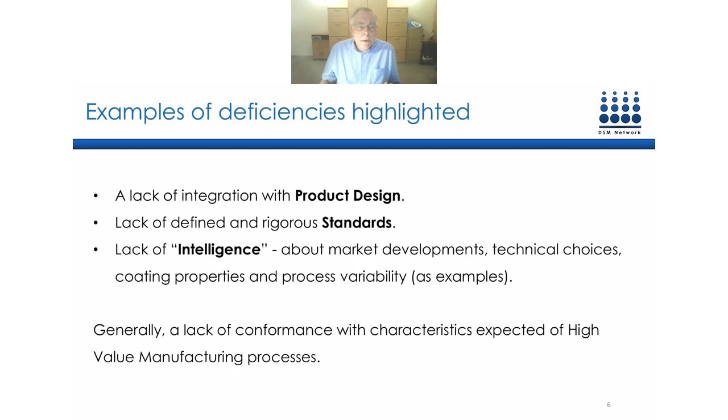As a result of this, Robert Quarshie of the KTN set up a thing called a special interest group.

A special interest group is a mechanism used by the KTN, Knowledge Transfer Network, to examine certain sectors of industry that they feel need special attention or to be looked at more carefully. In 2014, that special interest group produced a report titled an examination of surface engineering and advanced coatings, so that's called SEAC, Surface Engineering and Advanced Coatings.

Here you see the report that was produced, and the report is accessible online. You'd have to join this Connect organization, and then you can download this report. The report was called Time for Strategic Change, UK Surface Engineering and Advanced Coating Industry.

The report, as I said, was produced by a SIG, a special interest group. Why have a SIG? This was for several reasons. One was because of the perceived deficiencies, but also because surface engineering and advanced coating technologies had been identified as one of 22 national competencies in what was then the Technology Strategy Board's high-value manufacturing strategy.

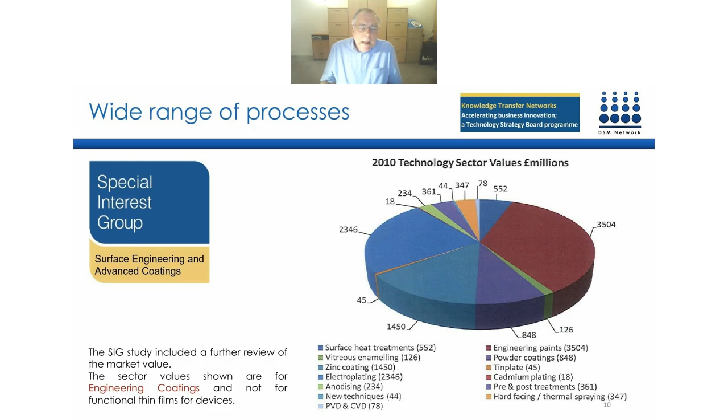More importantly, probably, these coatings are used in all of our key manufacturing sectors. So, for example, aerospace uses about £1 billion worth of coatings and treatments. Automotive uses about £2 billion annually. Construction about 3 billion, oil and gas about 2.7 billion. You can see other key sectors all use significant amounts of coatings.

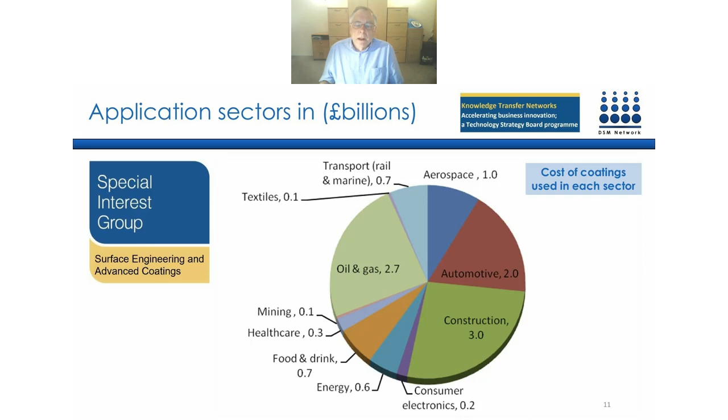So it is an important sector. It merits being looked at and being helped and being brought to a high level of innovation and competence.

As part of the SIG, Keith Harrison and I looked again at the market figures, and we added the government's latest categories and sector definitions, including food and drink, which weren't listed previously. What we found is that industries with a total turnover of over 383 billion relied on products which were coated. The actual products themselves that were coated had a value of about 140 billion, which is fairly remarkable considering we're driven there by about 11 billion pounds worth of coatings.

So those products couldn't function without coatings. So 11 billion pounds worth of coatings enable the functionality, or the key functionality, of 140 billion pounds of product, which then go on to contribute to industries with that 383 billion turnover. So it's a very, very important sector.

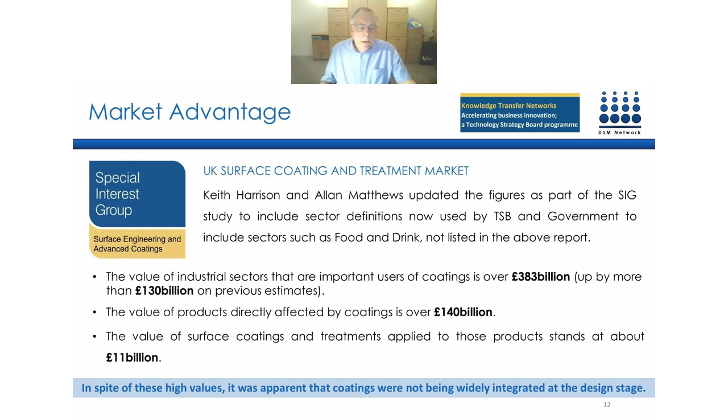Now, this diagram at first sight looks complicated. One of the key drivers within the SIG was David Rickerby. David was with Rolls-Royce at the time, and he produced for us this diagram which illustrates Rolls-Royce thinking at the time about coatings and the coating sector.

The feeling was that presently, at the time, the focus was on end user resources, supporting the current application supply chain. In other words, where products were failing, they would try to apply a coating, or where they were achieving functionality, they applied a coating.

What they wanted was for the coating sector to integrate with the manufacturing sector, to fully get involved in the design of products. In order to do that, the sector needs to go through the full technology readiness levels in terms of creating standards, validating standards, and introducing process control. Then you can feed the service experience back into the design stage and develop and validate, standardize, and actually bring through a more effective product with a fully integrated coating.

That's kind of my simple explanation of what that's illustrating. And that underpins and kind of emphasizes the need for digitalized information about the coatings and about the processes.

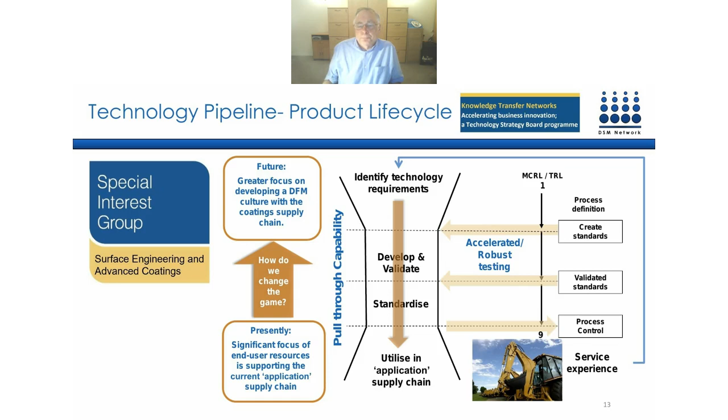So what the SIG recommended is certain actions were needed to address those barriers. So what was needed was better performance information about coatings and better accelerated tests about them, more applied and industrially relevant research, a need to address sustainability and environmental impacts of coating systems.

Of course, we're all aware of REACH, but there are other health and safety reasons why we need to be aware of sustainability and environmental impact of coatings. And then there was a feeling that we need to improve technology transfer. We need to encourage cross-sectoral exploitation.

It was well known that the coatings used in the digital sector, in the devices sector, were well digitalized, but the coatings in the engineering sector weren't. And by the way, those figures I gave you on the market values were just for the mechanical engineering sector. They didn't include thin film devices and semiconductors, which are all coating industries anyway, but the deficiency wasn't recognized to be in that sector. It was recognized to be in the mechanical engineering coating sector.

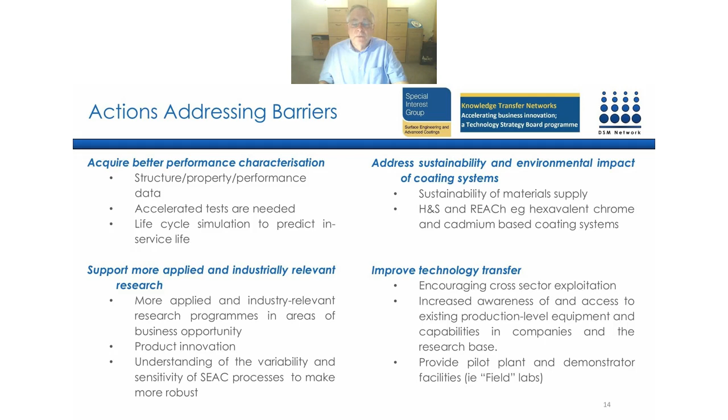At the same time, we've seen this rise in interest in Industry 4.0. So it was recognized that we had Industry 1.0 in the time of the Industrial Revolution. We went through to Industry 2.0 at the time of Henry Ford and mass production. Then we went into Industry 3.0, where you have PC control and automation. And now we are really in the Industry 4.0 regime.

We have so-called smart factories, which utilize cyber physical systems to monitor and control manufacturing processes. So the idea is that manufacturing is completely digitalized and carried out on demand, often to near net shape. We are, in a way, fortunate that the needs of the coating sector are paralleled with the needs of many other sectors in industry, and the driver towards Industry 4.0 means the coatings industry needs to also adopt and adapt to that requirement.

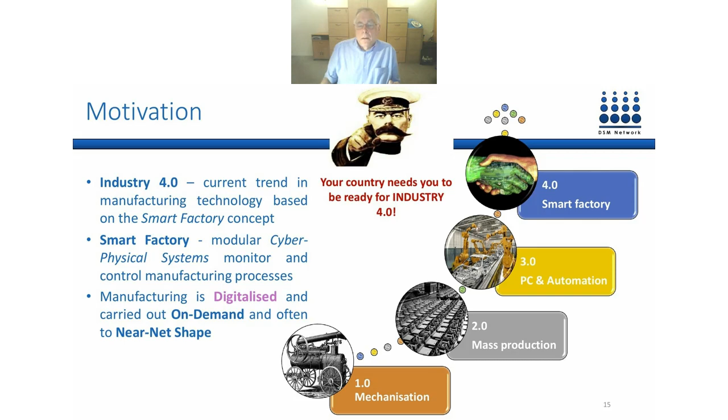This is reflected in government policy. In the government policy paper of December 2018, the policy was set out that we had to strengthen the UK and lead industries in the future via what they call 4 pillars, or grand challenges, as drivers of productivity.

Within these 4 pillars you can see AI and data as being key. The government policy states that those 4 pillars, which include mobility, aging, and clean growth, will drive an increase in productivity under the headings of people, ideas, business environment, infrastructure, and places.

That was underpinned by something called the Made Smarter review, which estimated the benefits of adopting industrial digital technologies to be up to 455 billion in the next decade for the UK manufacturing sector. Now, we've said that the coating sector is worth about 11 billion and related products about 140 billion.

But in terms of the academic lead, although it's recognized throughout the world that the UK has some of the best academic research in coatings and treatment processes, it was also recognized that no single UK university has all the required interdisciplinary expertise, and there's a lack of connected knowledge in the area of digitalisation in surface engineering.

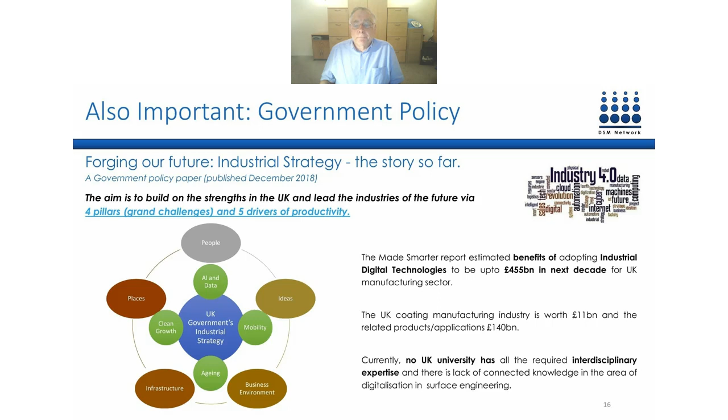Another point made in the Made Smarter review was that the UK is lagging behind other advanced nations in overall productivity, whether measured in output per worker or whatever measure you wish to apply. It was felt that this was due in part to lower levels of adoption of digital and automation technologies, and that this was particularly acute amongst small and medium enterprises.

Now, when people talk about improving productivity, they often talk about the 7 wastes. If you go online and search Google for 7 wastes, or even 8 wastes, another jargon term, you see diagrams like this. This one's taken from a particular source, but there are many out there, and I've extended on that one.

The wastes include overproduction, too much inventory, too much transportation, too much motion of people carrying things around, waiting for things, waiting for raw materials, waiting for product to come through, defects, and over-processing. Of these, overproduction, defects, and over-processing are key. If we can reduce these, we can increase the added value and increase the productivity of industry. This idea of getting these aspects under control is no more important than in the coating sector.

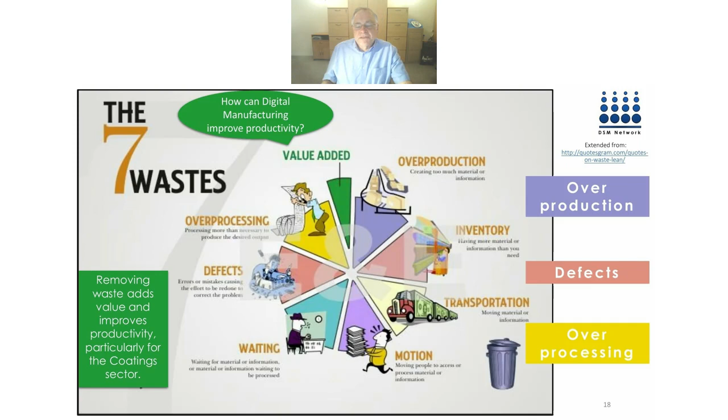So in order to digitalize, they call it the digital gap - how far industry is short of being fully digitalized. But if you can close that gap, you can get better utilization of your assets.

You can reduce your dependency on tacit knowledge. You can reduce the time and cost linked to product verification. You can improve and give visibility to all business performance metrics like yield, right first time, cost, delivery, quality, and equipment effectiveness. And you can fully enable and improve design for manufacture. You can open up new business opportunities and provide a framework for developing improved business as well.

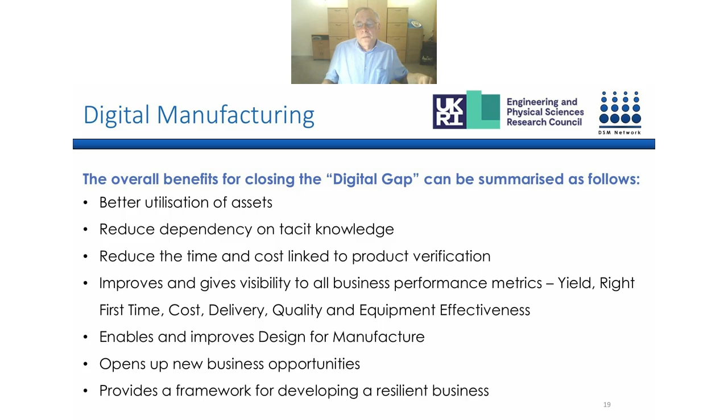So that explains why we need it in academia. We need to improve the research we do to achieve those benefits. But also, as I said, that report, the SIG report, was driven by industry.

Fantastically, the industry has grasped this challenge and created something called SELF, the Surface Engineering Leadership Forum, which is an industry network. SELF will work closely with the new EPSRC Digital Surface Manufacturing NetworkPlus, a £1 million investment by the EPSRC to bring together the diverse expertise and capabilities in UK academia to enhance digitalisation in surface manufacturing and move the sector forward to meet those Industry 4.0 challenges. It will be done in very close collaboration with SELF.

More about that later. So the Digital Surface Manufacturing Network already has, well, at the time we applied for it, 60 members.

It's now got more than 100 members from over 36 organisations. The main academic teams are at Manchester, Queen's University Belfast, Sheffield and Cranfield, and Saurav has just moved to London South Bank, so we've also got London South Bank University involved.

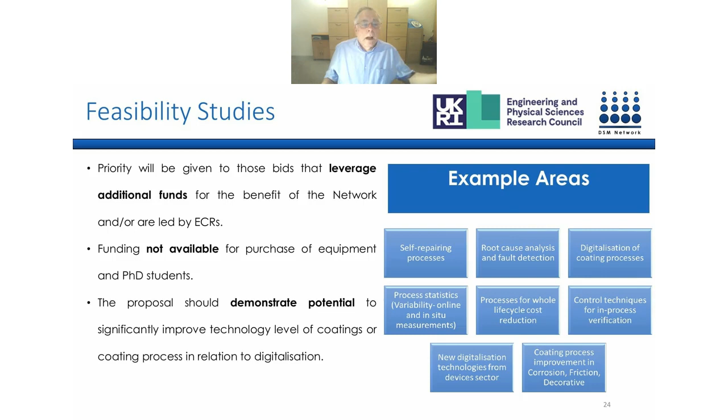And demonstrator projects, which I mentioned, will include things like the production of predictive digital twins, multifunctional coated surfaces, multi-objective optimization, automated masking, in situ non-destructive inspection, and in situ measurements.

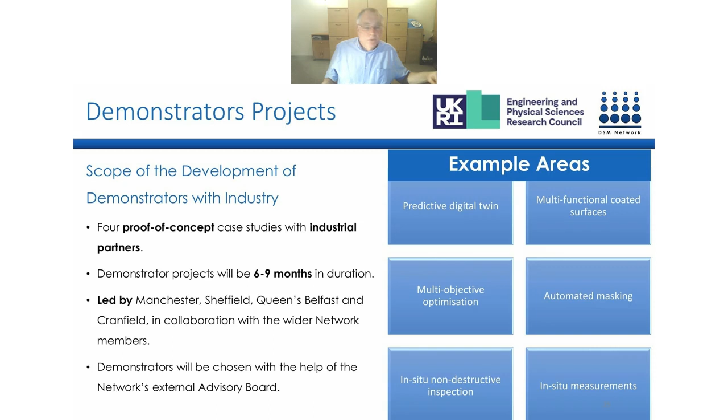Again, just as examples. Training and development will be a key part of the NetworkPlus. It will involve mentoring, fora for early career researchers in particular, secondments of people, academics into industry and industry into academia, and there'll be a summer school next year.

The Digital Surface Manufacturing Network will work with SELF on its new apprenticeship program, which was largely driven by David Rickerby. David was telling me yesterday that a key part of level 7 of the apprenticeship program will be to address the 7 wastes. So if you want your people to understand and address the 7 wastes, please get them started on the SELF apprenticeship program, which is fully validated and conforms to all of the apprenticeship requirements.

The network structure includes a management team: myself, Adrian Murphy from Belfast, Ashutosh Tiwari from Sheffield, and Saurav Goel from Cranfield and London South Bank. Our industrial representative is Bryan Allcock, and our network manager is Pamela Sharma.

There is also an independent advisory board incorporating David Elliott from the Surface Engineering Association and from SELF, and from academia, John Nichols. Our international representative is Jose Luis Endrino, formerly at Cranfield and now in Spain. For the EPSRC, we have Becky Chisborough, and for government agencies, Robert Quarshie, who has been a strong advocate for surface engineering in the higher corridors of government and most effective in getting improved funding for research into coatings and surface engineering.

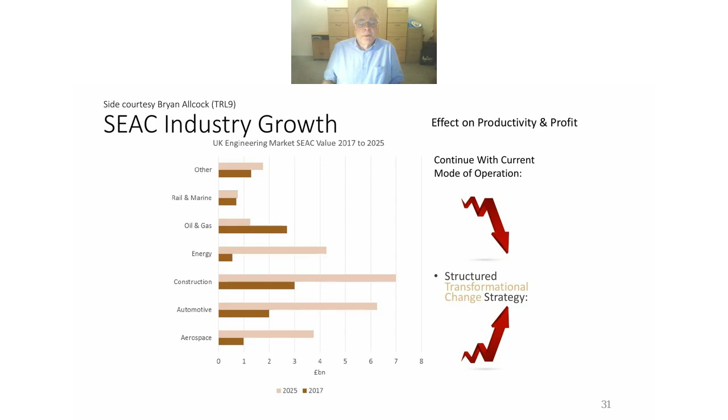But if we do go through a transformational change and adopt these digitalization practices, the sector will be able to address these growing markets, and the profitability and productivity will improve.

Bryan also presents this in this way, or the people that work with Bryan, including Dave Rickaby, talk about a transformational change—moving from being match fit to being best in class to being world class. You need to go through a series of stages in order to win and move forward.

You can look first at core activities like operational improvements, addressing the 7 waste methodologies, moving towards the digital, filling the digital gap, implementing digital manufacturing, until eventually you move to a full design for manufacture, fully transformed industry, applying design for manufacture.

That's the transformational route we intend to go through, both within the digital surface manufacturing or digitalized surface manufacturing network and within SELF.

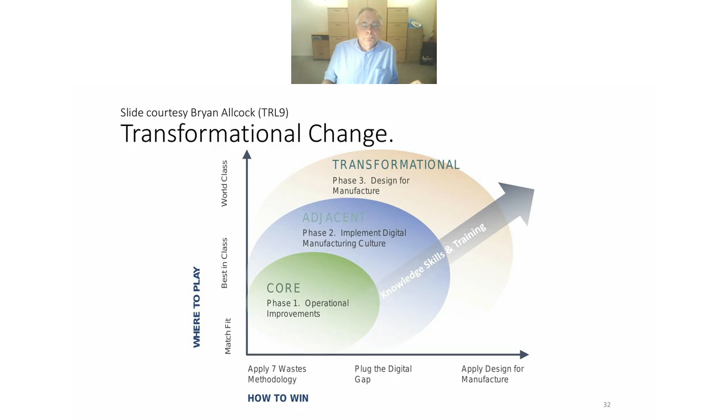Of course, there's nothing very new in this, but often you find that people reinvent things. I know statistical process control really took off in the 50s, but my thinking is that with full digitalization, we can fully access the benefits we're all aware of that you can achieve from statistical process control.

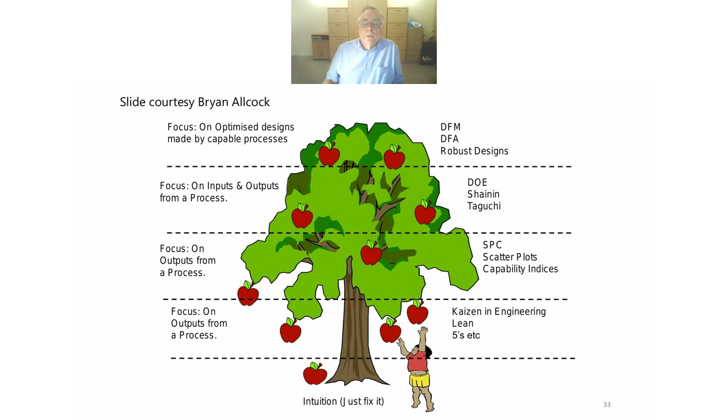Some aspects of control - this is a slide which Bryan sent me, and David was telling me this is very much also his input. You start off by looking at predictable performance, asset care, control of inputs and process failure modes and effects analysis. Look at the process basics, have reaction plans if things go out of control, and be ready to accept that when you introduce your reaction plan and don't get it back in control, you've got to rethink the whole process. You've got to look at variation reduction, process capability and key performance variable strategy, continue with process failure modes and effect analysis, and then go into your engineering attributes, engineering standards, control strategy and validation to ensure you meet cost and quality requirements.

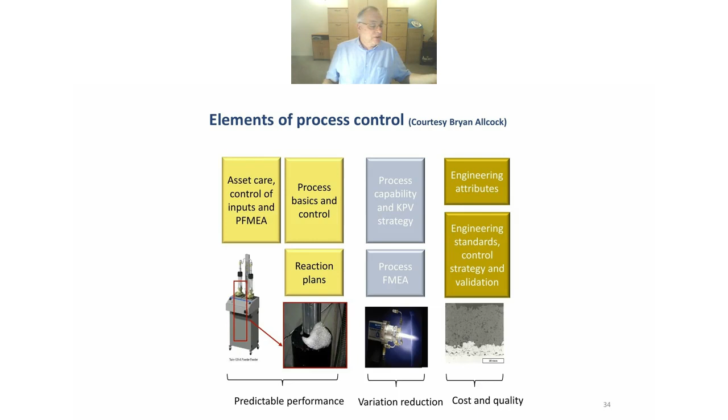This is the kind of thing that's been implemented over some years. This shows one particular manufacturer and how they've managed to bring variability well into control using asset care, in-process checks, compliance audits, and in-process verification. So this is the underlying understanding of what we need to do.

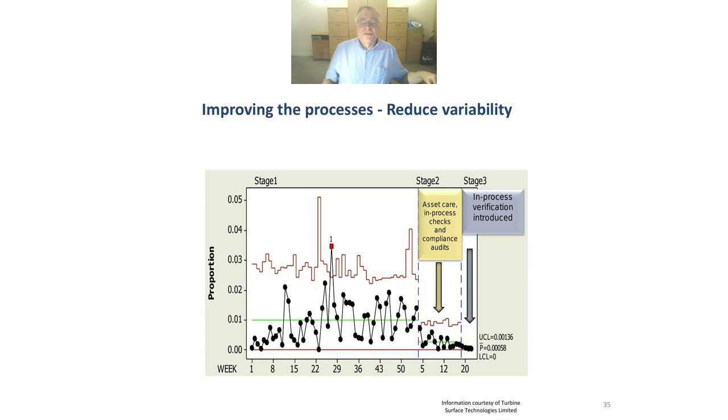Digitalization effectively links the digital world with the physical world. This is a slide I got from Saurav Goel, part of a keynote paper from Richard Leach at the CIRP, the main production engineering research organization. So basically, digitalization is a virtualization of reality, one way that was stated. We attempt to understand a machine's function by creating a digital blueprint of its reality, so everything you see is represented digitally.

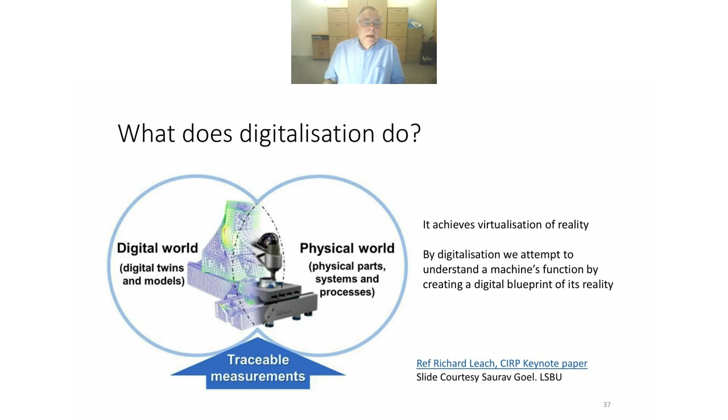Coming back to Bryan Allcock, what he's done - he says his best operators can see and hear when a process is operating well. But of course, you can't rely on the subjectivity of the operator. So what Bryan has done very effectively is introduce so-called cyber physical devices, sensors within his process, to observe and listen to the process, and to ensure that his processes are under control, fully digitalized via these cyber physical devices which monitor the process.

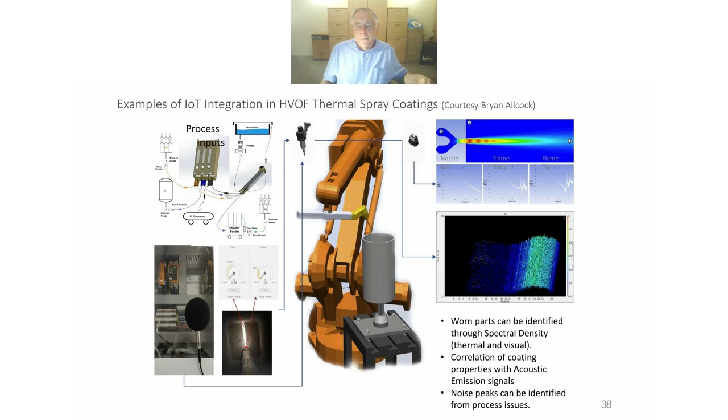At Manchester, we've done quite a lot of work on the plasma-assisted electrolysis process, and these slides are from Aleksey Rogov and Aleksey Yerokhin. Aleksey leads this group, and for plasma-assisted electrolysis we can remove material, for example by plasma polishing. We can modify material through cathodic and anodic plasma treatments, and we can convert surfaces through, for example, plasma electrolytic oxidation. So basically you combine electrode reactions with high energy species from the plasma.

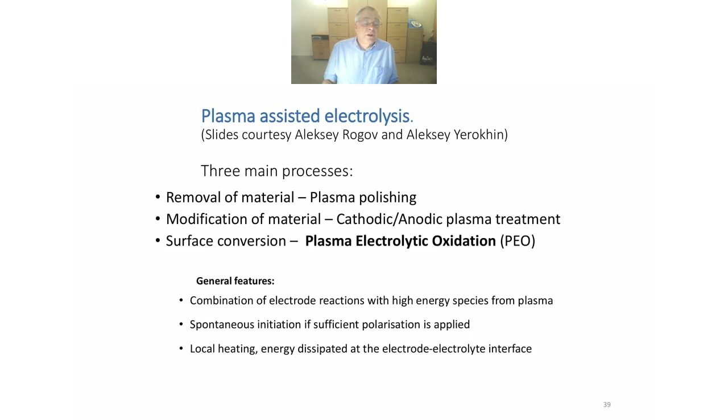You can spontaneously initiate the process if you apply sufficient voltage, and you can get local heating, and the energy dissipated at the electrolyte interface allows you to convert the surface of that electrode. Quite a powerful technique - it's fast, no pre-treatments, better protection, compatible with complex shapes. It's very safe, no toxic elements involved, and you can produce a wide range of surface properties.

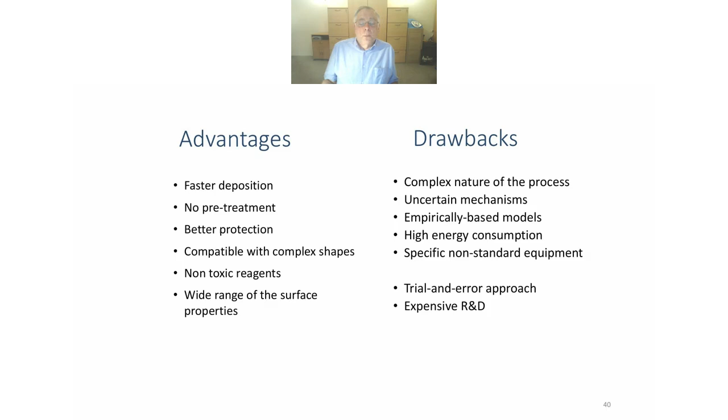The drawbacks, which is what lends itself to digitalization - it's a complex process, the mechanisms are somewhat uncertain, it's very empirically based, has high energy consumption, and you spend a lot of power heating the water-based electrolyte. It uses rather specific non-standard equipment and has adopted in the past a rather trial and error approach with rather expensive R&D practices.

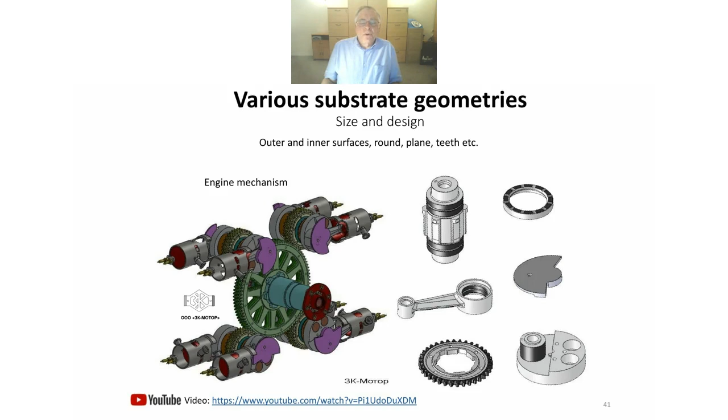So what you've got to do is go back to your basic equipment involved in your plasma electrolytic process and fully digitalize it and link it. So you've got your power supply, the electrolyzer itself, the cell, the specimens, the sensors, the digitizer, the data logger, and then other features like cooling and gas extraction.

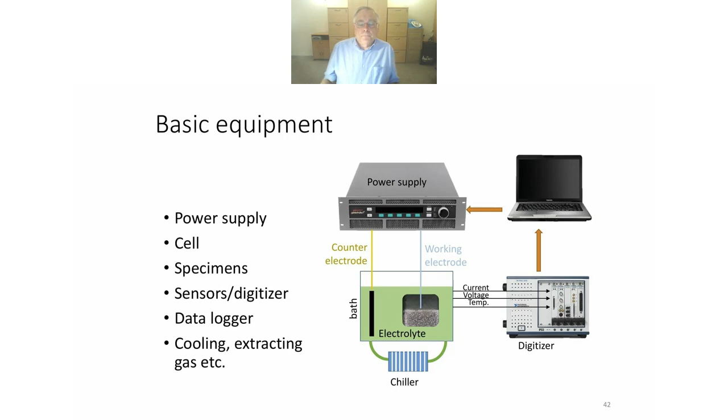What Alexei Rogov has done really draws on the capabilities of digitalization. He says you've got to develop a G model - your geometry and shape - and a process model, which he calls the P model. You've got to bring together the P and G models, might even incorporate 3D printing into production of your part, and then go through to production in a very controlled way. Very difficult to do this, of course.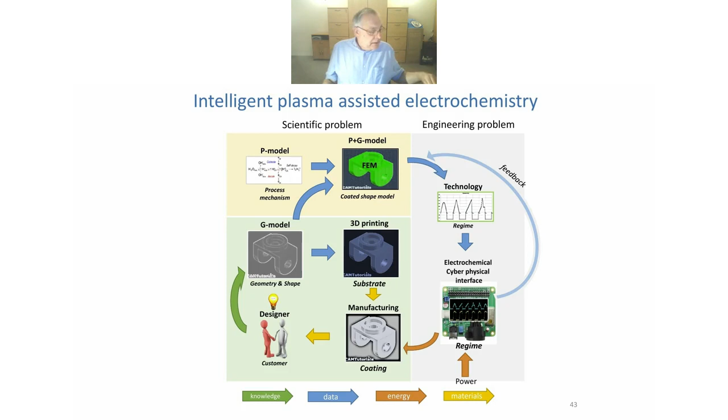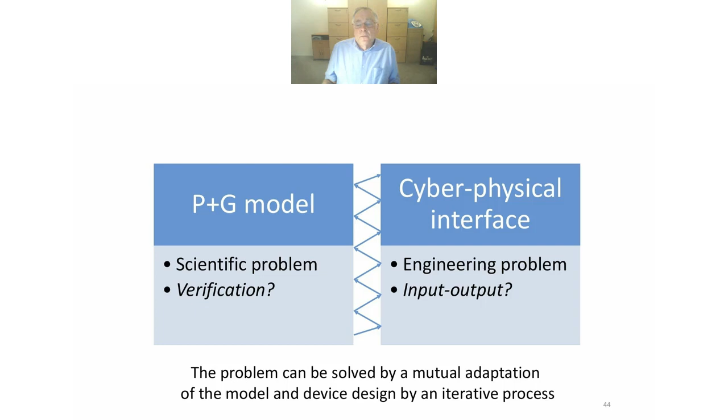This is the scientific problem, and there's an engineering problem, and that relates to how you link all this into your cyber-physical device. This is something that Alexei has managed to do, linking together the process and geometry model with the cyber-physical interface in a rather iterative way, which gives you the control you need. The key to this is to create what they call a digital twin, as I mentioned.

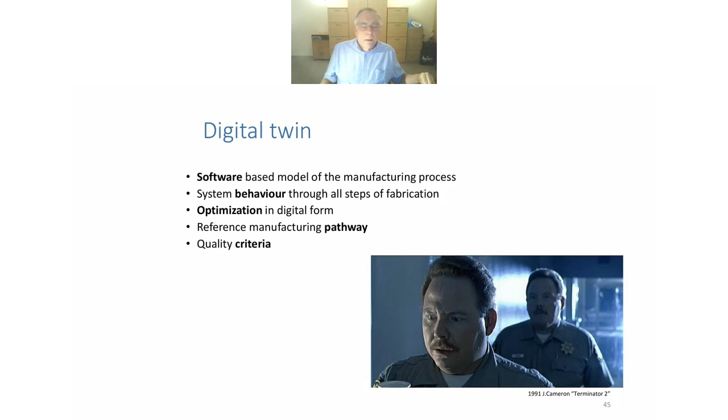So you need a software-based model of the manufacturing process. You've got to be able to follow the behavior of the system through all steps of the fabrication. You've got to optimize the digital form and have a reference manufacturing pathway with full quality criteria. Just to illustrate what that means.

In normal, traditional production, you produce something and then you test it. And if it doesn't conform to the quality criteria, you reject it. You don't monitor faults during the process, and you could easily produce junk. You could go some way to overcoming some of that by having intermediate progressive testing, but even then you could well produce defects which you can't correct during production.

However, if you have a full digital twin and you follow your production, you can do it virtually to begin with, or all the steps of the way. You can actually monitor defects or the effective creation of defects on a microsecond basis. That's the core of digitalization and the benefits of the digital twin.

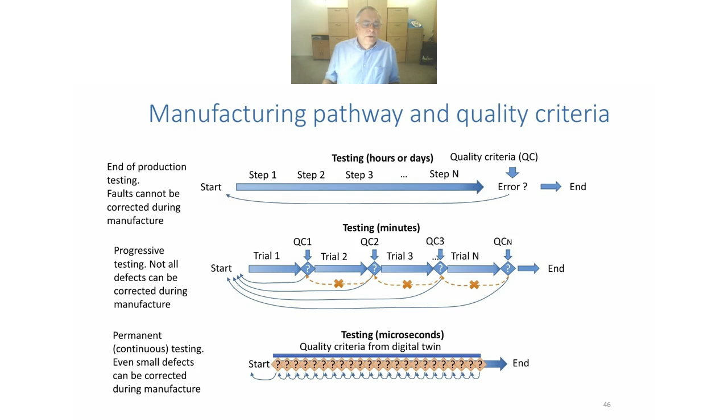Another diagram - the old adage is it's better to build good quality in than test bad quality out. What this one does is you could easily produce bad quality and you just have to scrap it. With this, you ensure that you always produce good quality and you're in total control of the process.

So another diagram here from Alexei Rogov. You will have your ideal manufacturing pathway, and then you will monitor it. This can be in the shape of a digitalized twin, if you like, of the real process. You can run through your digitalized twin process or the real process by monitoring with your cyber-physical device, and then utilizing your digital twin to monitor when you're going out of control.

Now, that might seem like an abstract concept, and it is rather abstract, and it's difficult for people often to get their head around this, but it works, and it works very effectively, and it really does illustrate very powerfully the benefits of full digitalization and the building of the digital twin.

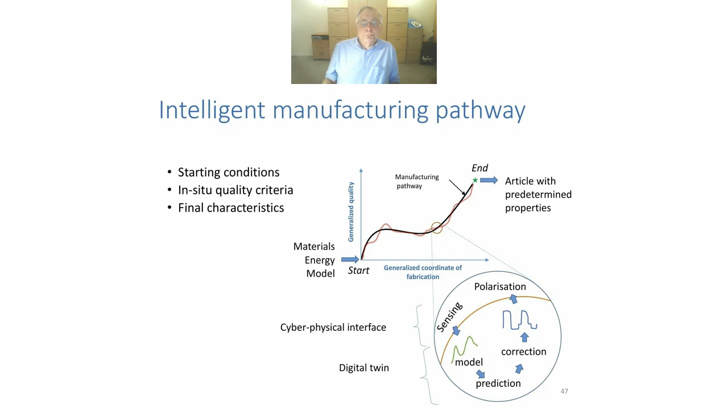So it illustrates how an intelligent manufacturing pathway can be devised and followed - basically a trajectory of the process parameters available for automated tracking and decision-making under in-situ manufacturing control. Fundamentally, it incorporates a digital twin, a complete model from which a certain solution can be derived. And of course, there can be many pathways. The beauty of this is you can easily revise the pathway depending on the requirements of the surface properties for different applications.

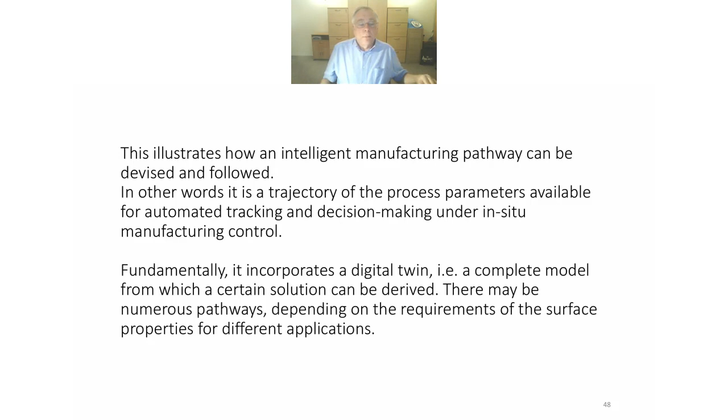Just to reiterate what the NetworkPlus will do: it will encourage academic research in this field, improve process and coatings modeling, facilitate state-of-the-art coating facilities, drive improved digitalization in the coating sector - the processes and the coatings - implement improved characterization analysis, improve performance evaluation and test methods, accelerate fruition of new innovations to market, enhance coating throughput rates, facilitate full life cycle analysis for coated products, and this list is extending all the time.

I think hopefully I've turned you on to the benefits of digitalization, and you can see that it is phenomenally powerful, and it's going to give us all kinds of benefits. However, we're only just starting this journey. The route to full digitalization is very challenging, as you can probably tell from what I've said. But now we have a clear understanding of the challenges and the determination to succeed. We've got a roadmap and a strategy, key participants on board, and we're aligned with governmental strategies, research council strategies, and very importantly, with industrial strategies. We really do hope that you will join us in this journey.

So thanks very much. That's the end of my talk.

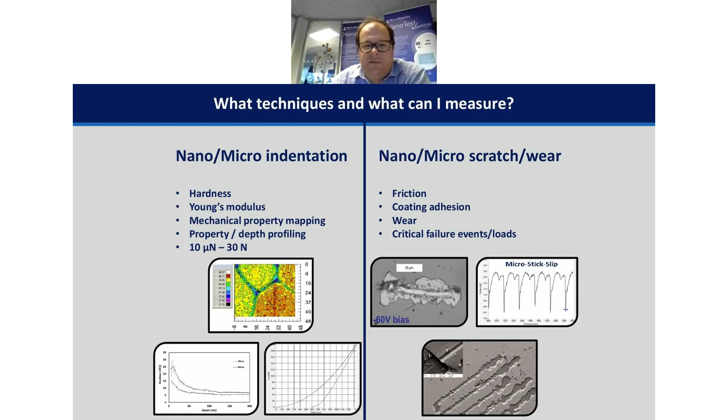We have some other tribology techniques as well, which bridge the gap between scratch testing, a single contact high pressure loading tribology test, and what we might regard as traditional tribology work with things like pin on disc tribometers. So we have some reciprocating sliding tests at different scales: nano fretting, and a device called nano tribo test, which allows us to do reciprocating sliding up to tens of millimeters sliding distance scale. Again, we can study friction and wear with these techniques, so we have different tribology techniques for different scales of interest.

Moving along the strain rate scale, the strain rates associated with indentation testing and scratch testing are pretty low, but of course a lot of materials are subjected to very high strain rates in their real world application, and it's very useful to be able to replicate those strain rates at the lab scale during the development process for coatings and bulk materials.

With these techniques, nano and micro impact, we can create single or repetitive very high strain rate contacts to look at toughness, fatigue resistance, and effective hardness at high rates of strain, which we call dynamic hardness.

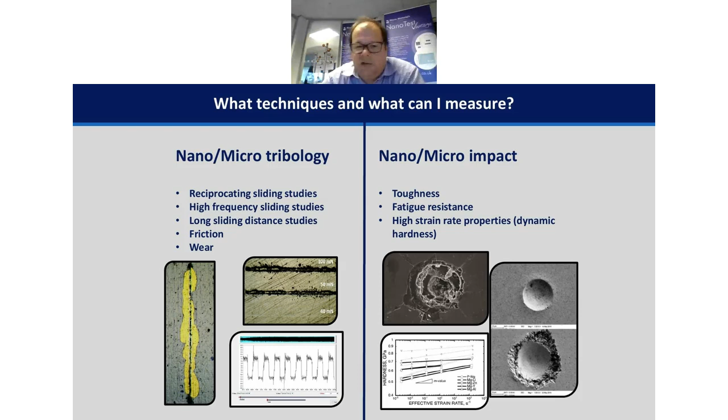There are other techniques as well which we can use, and these three techniques tend to be used a bit more in academia for fundamental characterization of materials. Certainly micropillar compression and micro cantilever bending are used with a variety of different materials, ceramics, metals, etc.

In this particular case at the bottom, what we're looking at is the effects of ion irradiation of tungsten alloys for nuclear power. It's important to use the small scale technique here, because the ion irradiation process only affects a few microns of the sample surface.

The micropillar compression similarly allows us to interrogate a small volume of material, and because we're working with a fixed volume of material, this is rather like a nanoscale tensile or compression type test, where we can convert our load and displacement data directly to stress strain very easily.

We can also work with materials other than bulk and coatings, including composite materials. Here we're looking at debonding forces in fiber reinforced composite materials, where we actually use a flat indenter to push fibers out. So coatings are a very important part of what we do, but we can also work with a wide range of other material types.

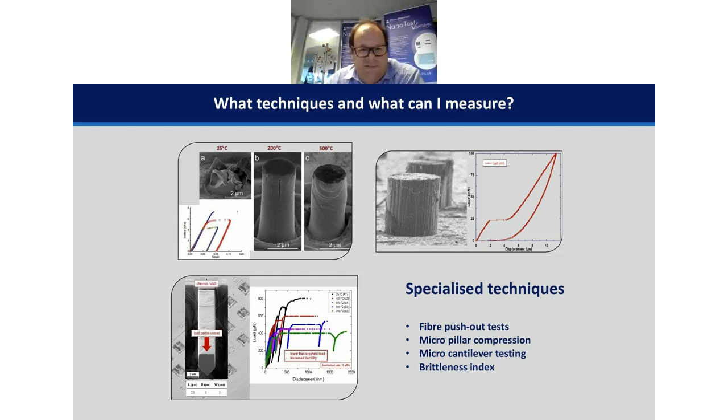What materials can we actually work with? Well, basically anything. Nano indentation was originally developed for characterization of thin coating materials, but it's been developed a long way over about 30 years. It's available as a technique, and we can work with biological tissues, polymers, hard biotissues such as bones, metals.

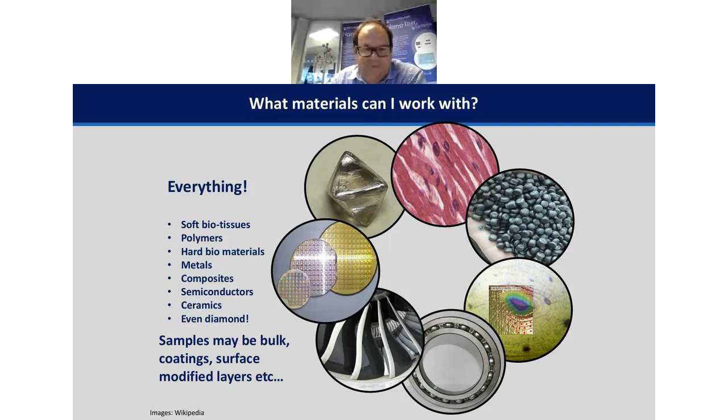Composites, semiconductor materials, ceramics, and even diamonds. It's actually possible, it seems a little counterintuitive, but we can perform successful hardness and elastic modulus tests on a diamond sample using a diamond indenter. And as already mentioned, the samples can be bulk, coatings, or surface modified layers.

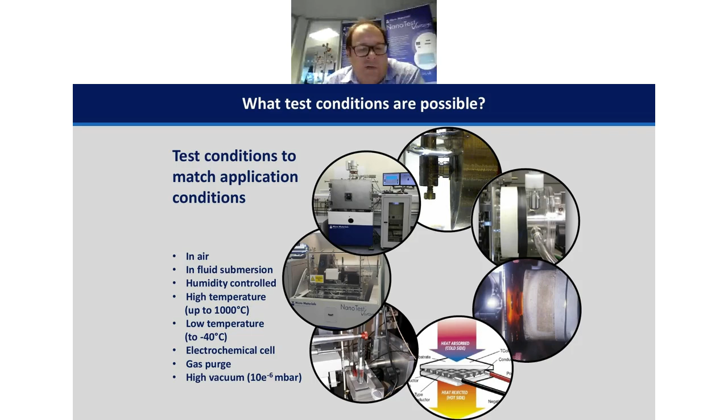Also important in lab scale testing is the ability to as closely as possible replicate in-service conditions. Most of the work people do with nano indenters is in air. However, we know material properties can change significantly with exposure to different environmental conditions, such as fluid submersion, exposure to high or low humidities, high or low temperatures, even electrochemical conditions, like a corrosion or plating environment.

When working at high temperatures, we may need to protect the sample from oxidation to replicate an in-service condition, so we have strategies to achieve that as well, including a gas purge chamber and a high vacuum nano indenter called the NanoTest Xtreme.

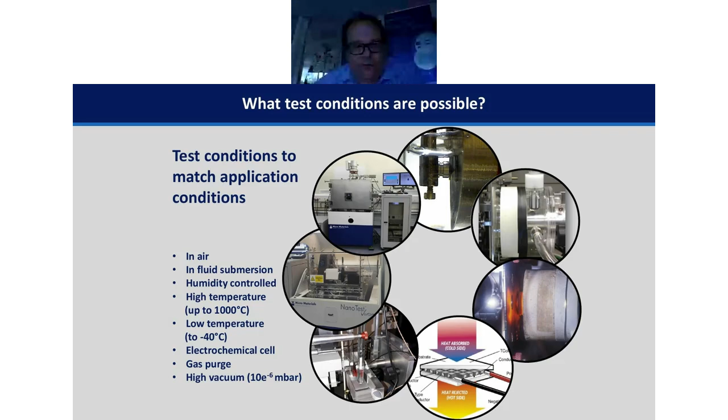So just a summary. Mechanical testing across the nano, micro, and macro scales is possible with our equipment, ranging from 10 micronewtons up to 30 newtons, using multiple techniques including indentation, scratch, wear, friction, impact, etc.

Any material type can be tested. We can work with bulk samples, coated samples, surface modified layers, etc. We have the widest range of testing environments offered by any manufacturer, we believe, to make tests as industrially relevant as possible.

And we have a highly experienced applications team available for consultation. So whatever material testing properties you have today, coatings or other, don't hesitate to contact us and we'll see if we can help you. I'll just leave you with an overview list of the various things we can offer here.

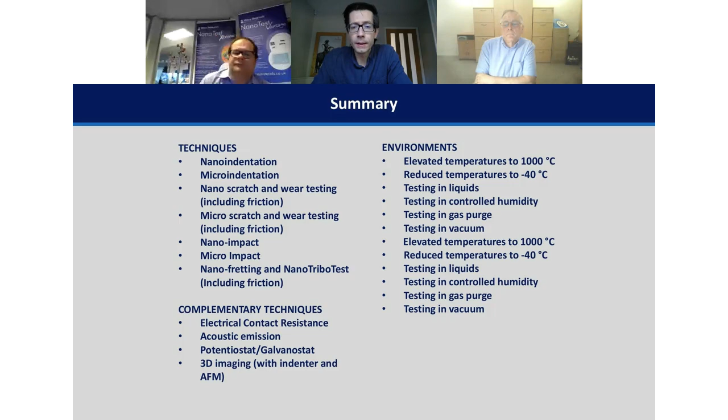Only a couple of minutes left, so if we could come back to you, Allan, I picked up some questions here. Chris is asking, how do you define coating within the framework of your work? Is it only one particular technology, or more broadly?

Oh, it's all technologies. Dave Rickard made a comment that I tend to normally only talk about PVD and plasma processes, but by no means is this exclusive. It's all possible coating techniques, all possible surface modification techniques and treatments, anything that can enhance the surface, basically.

With the proviso that we feel the devices sector is well covered by digitalisation, what we're aiming to address is the mechanical engineering coating sector, so mostly wear, friction control, corrosion, etc. And Lawrence is asking about AI and machine learning for development of new coatings and technologies.

Well, I didn't use the term machine learning, but that is effectively what's being done with that work on the plasma electrolysis process. It's using machine learning.

I think Jean asked about possible membership in Network, so how people can interact with Network. They can just go to the website - it's on at least one of the slides. If you search digital surface manufacturing, you'll get to our website. You just sign up there, there's no charge, and you can give as much or as little information about yourself as you wish. Pamela Sharma oversees that, and she'll be available to answer any questions about it.